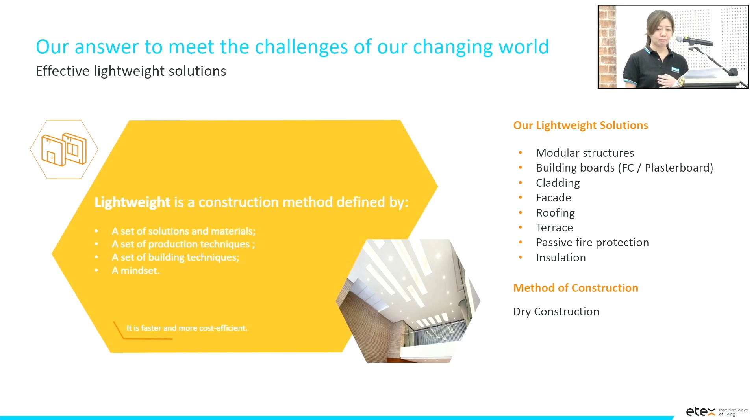All these solutions cover buildings, exteriors, industry, and insulation, and Etex New World, which is under modular construction as well.

We are a global company from Belgium with almost more than 120 years of history, present in most continents. Drilling down to ETEX Malaysia, we've had a presence here for more than 25 years, and we also have a fire test lab.

Here we host the marketing team, the technical team, the commercial team, and the rest of the functional teams as well.

I would like to introduce our team. These are the teammates we have from the technical, marketing, and commercial teams. Our main speaker today is also our regional technical manager for Asia, Promat Asia, John Cha.

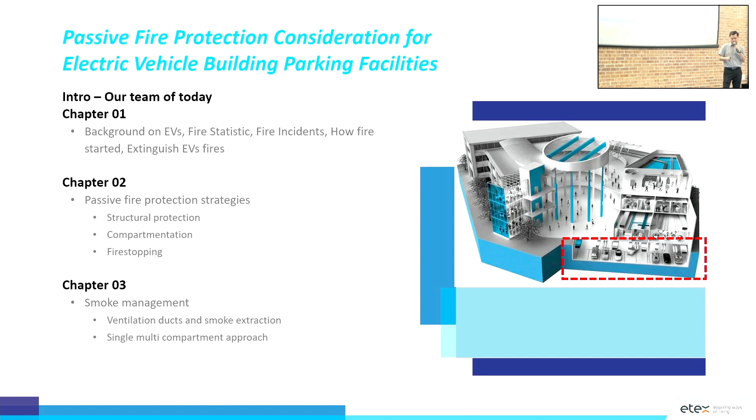So let's quickly go through the background. I was surprised when I dug through the information. Actually, EVs are nothing new, in fact. It actually started in 1832.

Before that, of course, transportation was like riding the horse with a carriage behind, something like that. So during that transition stage, they created an electrical vehicle. It's not the petrol-driven one first, actually. That was centuries ago. So when you look at it, already in 1832 they are talking about electrical-driven transportation.

Then where does this electricity come from, actually? So then I dug further, the batteries were invented by Alessandro Volta in 1800. So they already had this battery thing, but of course not like today what we have. The basic principle behind creating batteries is two metals in contact through some electrolytes, some electrons, ions moving around that create the electricity.

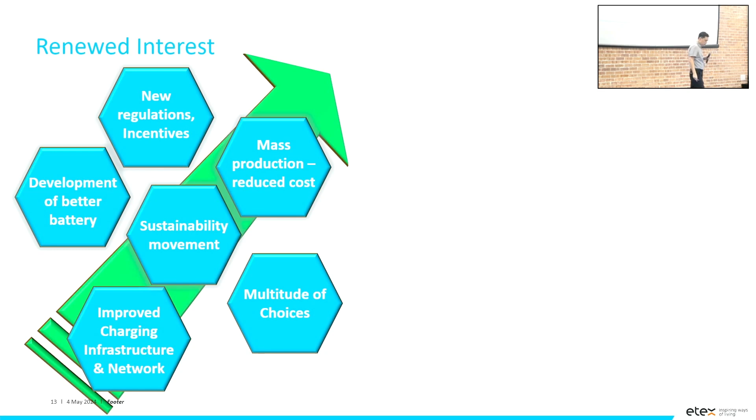But of course the battery technology has changed, with the support of all those microcomputer chips, supercomputers I would say. Those actually assist further on the safety of the battery itself. And then, of course, all this benefits us. As I mentioned, it's low noise, doesn't emit pollutants, low maintenance—not pretty sure yet—and better performance, that's definitely true.

And of course, cost saving. I'm not sure how they derive this cost saving because it depends how you look at it. The other day I was talking to my friend who was driving an EV car. He said, oh, I don't need to pump petrol nowadays, but my home electric bill surged. Right, because you have to charge every time, you have to plug in and charge, right?

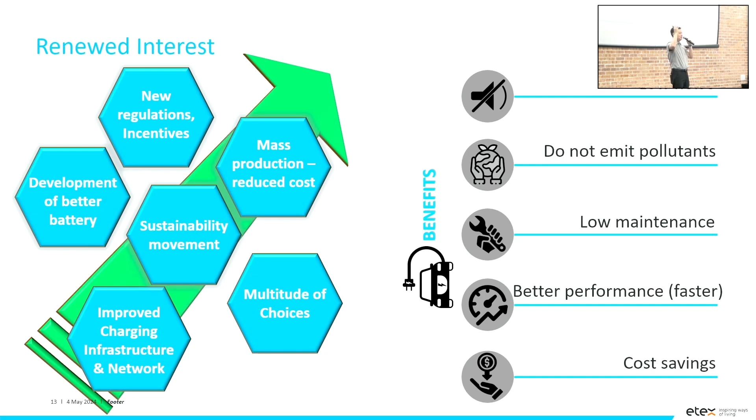But this can be easily solved with another technology, the PV panels, the solar panels installed at a house. That will solve this problem, I think, right?

Okay, so what about the statistics show on fires, EV cars on fires? This is pretty clear. If you Google, regardless of which statistics, it actually shows that the hybrid cars actually have the most cases, followed by the internal combustion engine cars, and lastly the electrical EV cars.

So how true is this actually? But if you really study in depth about the statistics - I believe most of you also do statistics or learn during your university days - it depends what sort of factors, what sort of criteria you use when you do a statistic. As I said, EV cars are pretty new, right? It's only like a decade, 10 years ago, they came out with EV cars.

So the cars are pretty new, actually. So the data, I don't know, maybe needs to be verified further. After some years, maybe 20 years later, the batteries may degrade, then it may cause more fires. So all this we don't know yet. It's not conclusive, all these things.

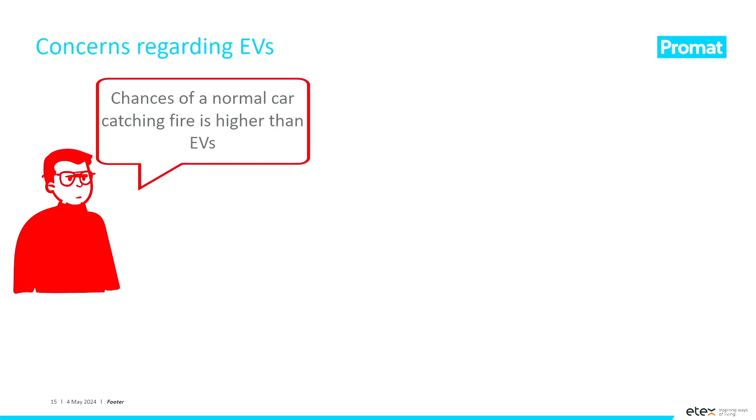So, of course, the concern regarding EV cars - the topic is still like, oh, no problem, chances of normal cars catching fire is higher than EV cars, so why worry? But it's not about that. It's about the severity, the consequences of it.

Okay, so basically, the overall severity in an underground car park is an enclosed space. For us as fire specialists, fire protection specialists, when it comes to enclosed space, it will build up a lot of heat inside there. So when something burns, it's worse, actually.

So when I give you an example, when we do a lot of fire testing - basically, when we look at the fire testing, there's a furnace, we look at the pressure, there's a pressure build up, you take into consideration. So those are some tests that we can actually do.

But in reality, we actually look at the pressure itself. If, let's say, in a room, there's a fire, enclosed - depends how big it is, that's why it determines the compartmentation size, in your UBBL, actually, all the theory behind it. So when it builds up to a certain stage, the fire will turn into flashover pretty quickly.

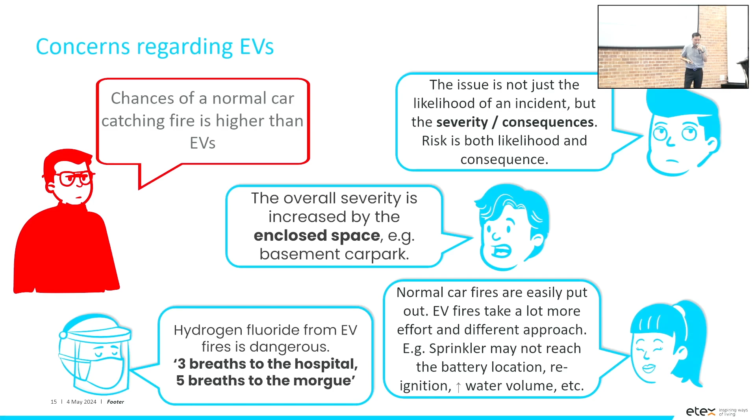Of course, if I use a fist and punch concrete now, I think I'd break my hand first, not crack the concrete. But during high heat, this moisture will find its way out to evaporate, and that will cause the concrete to crack - that's called spalling. This is something we look at seriously, especially in tunnel fire protection. Once the concrete spalls, your reinforcement steel bar will be exposed, and once exposed, it loses its strength.

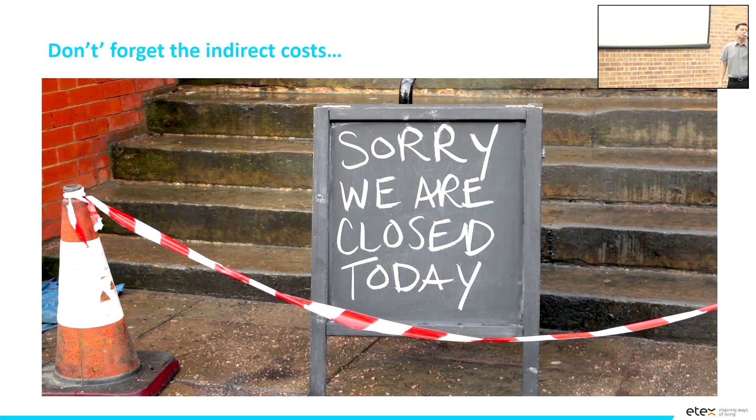So I will cover later on, in the second chapter, how we actually protect the structure. Quickly, of course, a fire in your underground car park will cause a lot of losses to the building owners themselves. We're not going to cover this because I'm not a commercial guy.

So let's look into these EV cars - pretty interesting actually. When you look at it, it's pretty straightforward, no wonder everybody is coming out, car manufacturers want to go into these EV cars. So you have just a motor - the electric traction motor to drive the wheel. On top of that, you have the main batteries, and you also have the other auxiliary batteries, which we also have in ICE cars.

So when we zoom in, there's nothing else - the suspension system and everything more or less is the same. So they don't have to deal with the big, complicated engine. Let's put it in very layman terms: the traction motor is something like a fan, your normal fan, there's a motor behind to drive the fan. But this is a larger capacity, needing a larger voltage to drive it. That's all, nothing much.

So that's why when we come back to the maintenance part, I don't know how you're going to fix it. If your fan broke down, can you actually fix the motor? I don't know, but you need to throw away your fan, right? So maybe you have to throw away the whole motor.

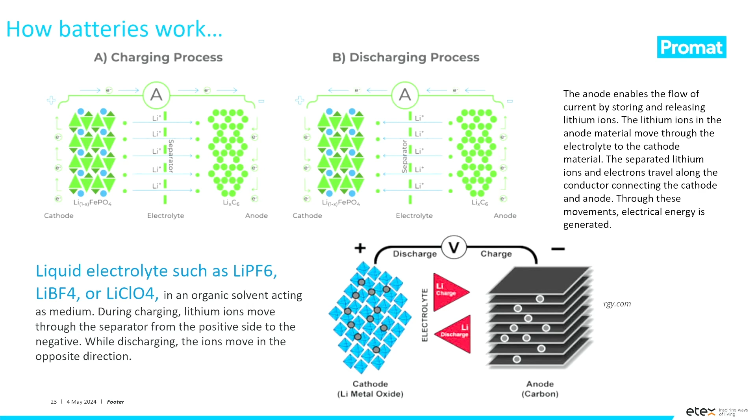So that's why the battery capacity - that's why a lot of car manufacturers keep competing: oh, I can run 400 kilometers, I can run 500 kilometers. All those come back to this battery capacity. So basically, the movement of the ion generated here actually creates the energy and it's being stored. After that, when you start moving your car, they start to discharge all this onto it.

So then now we zoom in further - what actually caused the fire then? The metal plate, the cathode and anode? No, it's metal, non-combustible. The membrane itself? No, that is non-combustible too. But it's the electrolyte - the fluid inside it, actually.

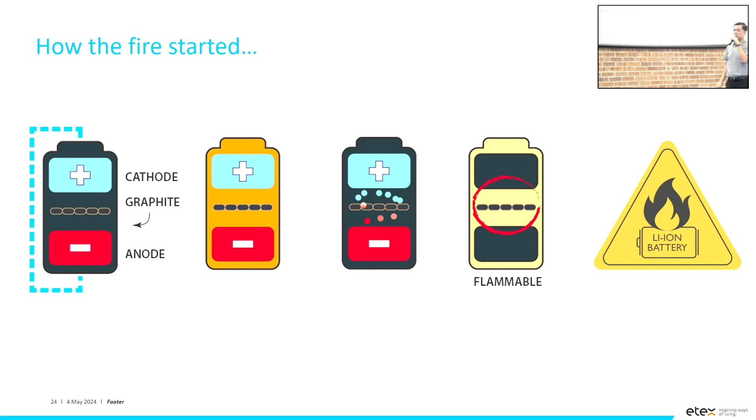So we zoom in further, we can see here - basically it's just a simple graphic about the batteries, how they generate energy, and this electrolyte actually is the combustible fluid. So how does it actually ignite now? It's already inside there, no problem, right?

Okay, so back to the basic principle - the battery cell itself is like a pressure vessel. So if there's a liquid inside and it's heated up, it will vaporize. When it vaporizes, it creates pressure on your battery walls. Until a certain extent, it expands and cracks, and that's where it leaks out. So if there's an incident, let's say you crash your EV car and unfortunately it hits the battery pack underneath, it causes the casing to crack, and it will ignite.

So then, of course, that is not the case if you park your car underneath ground car park charging - you will not cause the cracking issues. So why then? How does it actually suddenly burst into flame?

So overcharging is something that the charger manufacturers need to look into. But of course, looking at the technology today, no problem at all - especially like even our phones, during the early days there was a lot of explosion from overcharging, but now today no problem already. It will just cut off, it won't charge anymore if it's heated up. But in an event something goes wrong with the technology, this will actually happen.

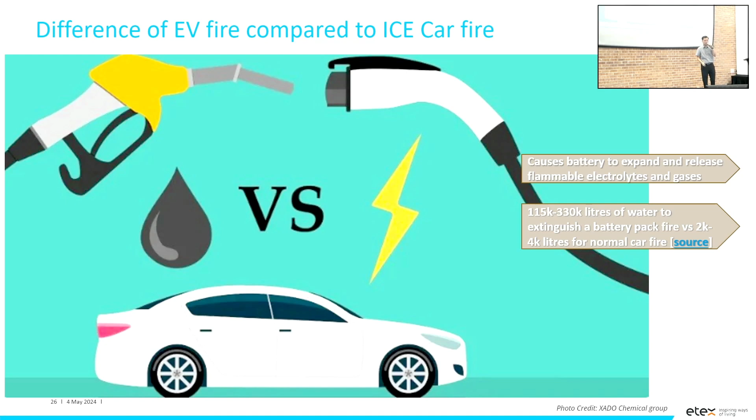So of course it burns for hours and hours. And not to forget, after our Bomba put out the fire, when the tow truck comes and tows the vehicle back to some place, there's a chance it can reignite again. Because of the build-up of heat inside each battery cell, they have a thermal runaway. It's not visible to our eyes. So once they reach a certain temperature, they ignite again, and they keep on continuing.

Okay, so of course the most important thing for us is definitely the fumes that come out from the batteries. This is like hydrogen fluoride and a lot of metals like cobalt, manganese - all those metal fumes, similar to what my colleagues who do welding every day experience - coming out from this vehicle during fire time. So it's really dangerous for health itself.

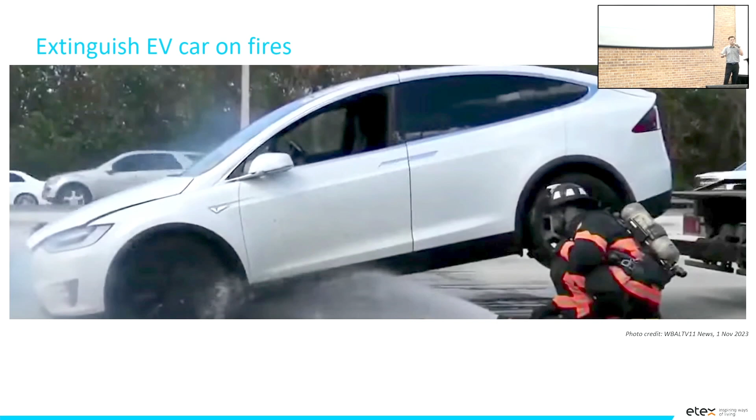Okay, so these are some of the methods I see in case of a fire. They no longer just try to suppress or extinguish the fire blindly, just shooting water or whatever. They have to do it from underneath - either you jack up the car and put out the fire, or some other countries have this special device, a targeted sprinkler, highly pressurized, and push it in to focus on the fire area.

So this is some of the way - they don't have to jack, so they put a brick wall to jack it up. Also notice that in Korea they have all these measures. I think the other picture you see, the blanket one, is in our Bomba guide - you need this blanket to cover it up. The other, weirder way is they actually build a barrier, then pump water and soak the whole thing underneath to cool down the batteries and put off the fire as well.

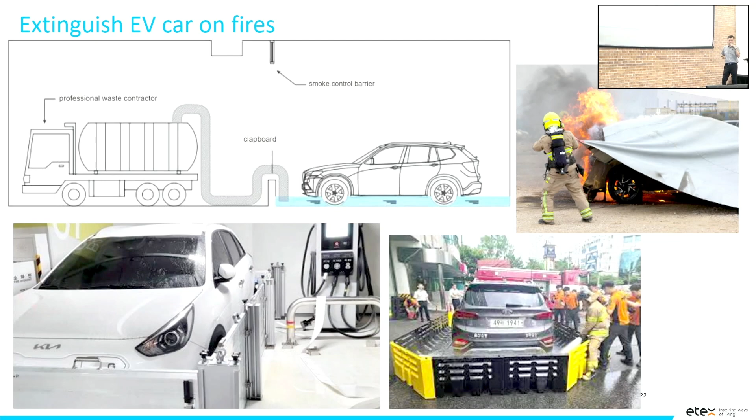So those are some of the proposals, and I think it's still ongoing - they're still trying to find the best way. But think about all this method - it's more practical outdoors, if the EV charging is outdoors. But what about underground? What are you going to do about it? Are you going to have such high-technology stuff like the barrier the Koreans did? Do you have the space? I don't know - those are for you guys to consider.

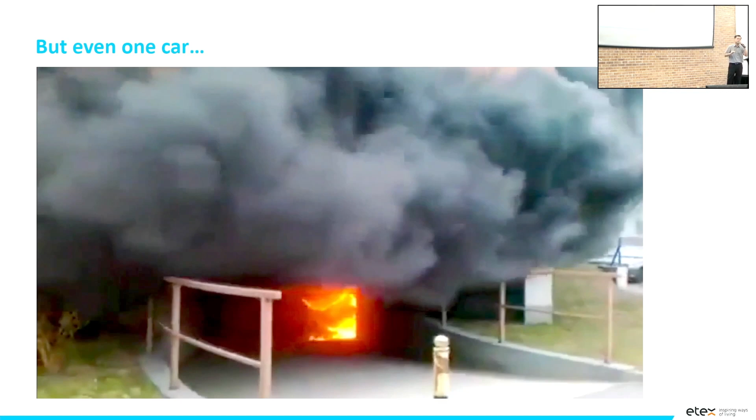All right, so let's remind ourselves a little bit - just one car on fire in a confined space, the amount of black smoke, hot smoke developed is tremendous. So don't play with fire, really. It's really terrible - I myself have already experienced this type of scenario many times. I don't know if by coincidence or not, during my fire testing, sometimes when you pass through and there's a fire, then you get a bit curious and see the smoke is like this.

All right, so let's move on. Now we understand the batteries, or everybody understands the batteries and how they generate the fires. Now how - what are we going to do about it? What sort of measures can we actually put in place? Even though maybe it's not in the guide yet, for us we need to be responsible because we are the building designer, we are the fire protection designer here. So we need to be responsible.

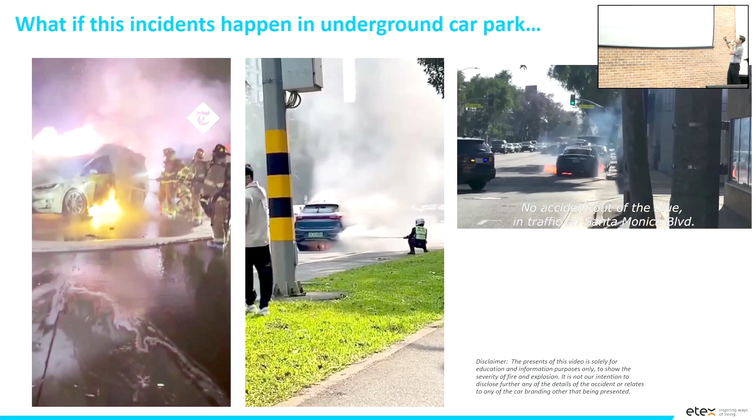So we can't put it out. If you see at the end, the guy also runs away. He cannot put out the fire by just a portable extinguisher, right?

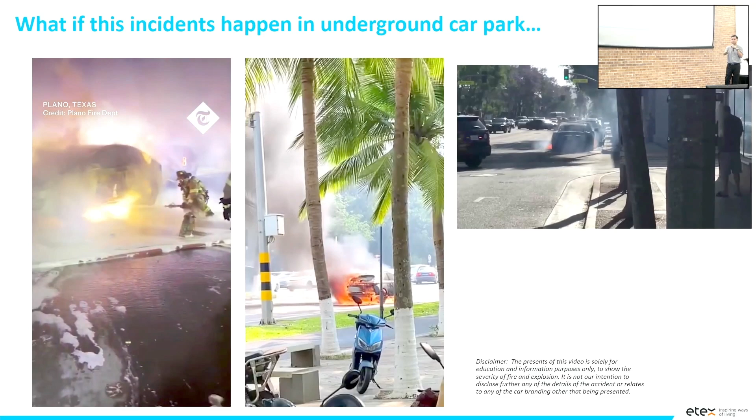Okay, so I believe most of you already know Bomba already came out with a guide. So if you want to design a charging bay, regardless of outdoor or indoor, they will actually teach you how you need to fulfill those criteria. But of course, I'm not going to talk about the overall guide, I will just highlight a few of it here.

So firstly, they definitely acknowledge that the vapor cloud explosion does happen in EV cars. As we understand, the battery vapor is some leakage from the battery in a confined space. The confined space definition here can be your encapsulated battery pack. If it leaks out from your encapsulated battery, maybe you park your car in a garage, then your garage becomes a confined space. So slowly it will build up, build up until it reaches the pressure, and with ignition, you will just explode like this car. It doesn't happen straight away, actually. It will take some time and then it just explodes. So they acknowledge this incident.

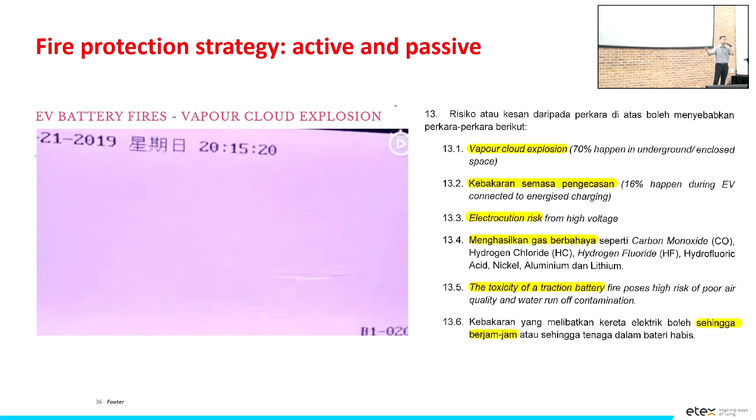So kebakaran semasa pengecasan, 16% happen, right? So it does happen. So there's electrocution risk because of high voltage. Don't forget the batteries generate 400 volts to drive the EV. Our normal is about 200 plus, so that's the thing.

Of course the smoke, when I talk about the fumes, the gases here - carbon monoxide, hydrogen chloride, hydrogen fluoride - all those are deadly, I would say. No chance for you to survive if you inhale this, because our studies during normal fires are talking about carbon monoxide, which can actually just cause you discomfort, maybe when you escape from the building it's difficult to find a path, all that stuff. But hydrogen fluoride, hydrogen chloride, all this is deadly. Even if you manage to get out from the building, ambulance sends you to the hospital, most probably you're dead.

And hours of fire - so those feedback statistics is mostly from outside. If the EV car is outside, the abang bomba can have his own sweet time to put out the fire. But what if it's in underground car parks? Cannot, you don't have a chance at all, right, especially with all the black smoke everywhere.

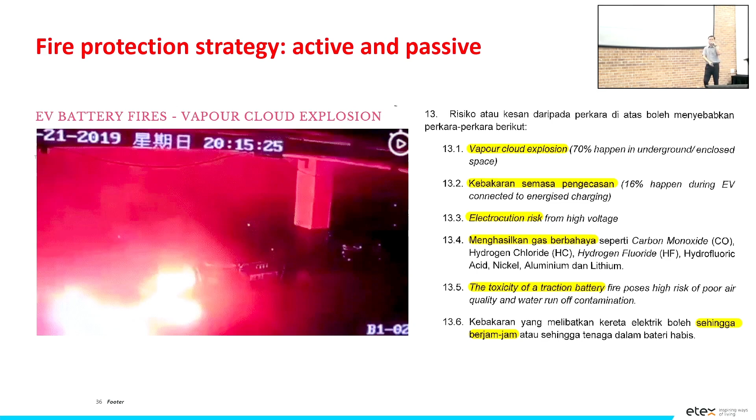Okay, so I extracted it - one of the points is you cannot actually position your charging bay next to your escape passage. I also noticed lately when you drive an EV car, the building owner treats you like a VIP, priority, so they put the charging bay next to the entrance, let's say of a shopping mall or anywhere. So it becomes like, oh, you're so proud of it, I plug in, then everybody can see you driving the EV car. But this is not a good way, right?

So because if there's a fire, then the fire will go inside your pintu kebakaran, everything, and your escape passage will act as a chimney, actually. So all the smoke will go up to the building. So you have to place it far away.

Okay, so then they also talk about how you need to have natural ventilation. So if your multi-story car park is above the ground, it's not a problem, you have natural ventilation. But if you are in an underground basement car park, you need to have mechanical ventilation. But they didn't elaborate further, because this is just a guide.

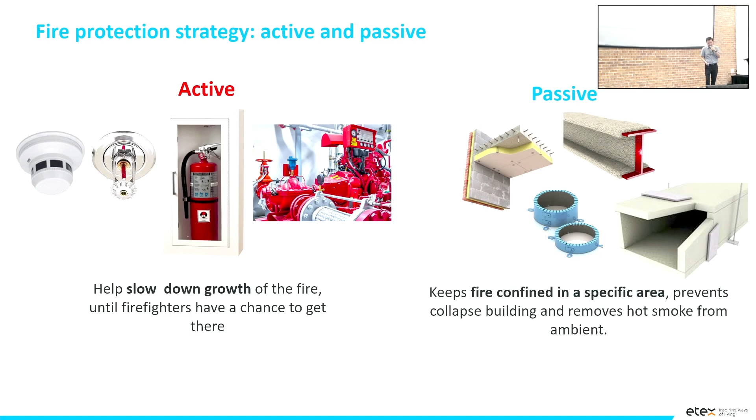Of course the scope, our objective is the same everywhere. Versus active, the most important thing is the building occupants can get out of the building during fire time, and at the same time let our firefighters go in and put out the fire safely. And the third is only the building. So human life is the most important here.

But when I presented this to some countries, everybody laughed at me. Human life? They said building is number one, the cost is number one. I won't say which country, but I think some of you know. They say, I have a lot of people, no problem. But regardless of which country, our objective is to save life.

So as I said, structural protection - I'm running out of time, but let me quickly go through it. Structurally, basically if you don't protect steel, it loses its strength at 550 degrees C. A lot of people throughout my years come to me saying steel is very strong, no problem. Yes, during normal ambient conditions, but when exposed to 550 degrees it loses its mechanical strength and starts to buckle. When it buckles, what happens to your building? It collapses. So this is the first area of protection we look at in a building.

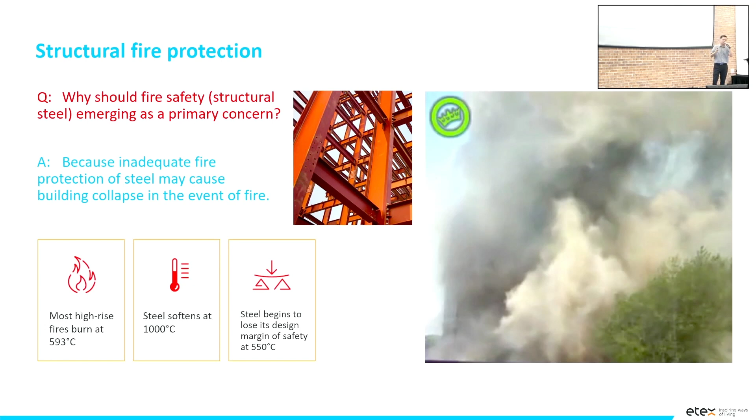Structures, especially buildings made of steel structures, still need to be protected. Not just simply put some concrete and hide it - no, you need to protect the steel appropriately. So those are some visuals. I'll run through quickly - these are some hot smoke rising up, so the first thing they attack is your ceiling.

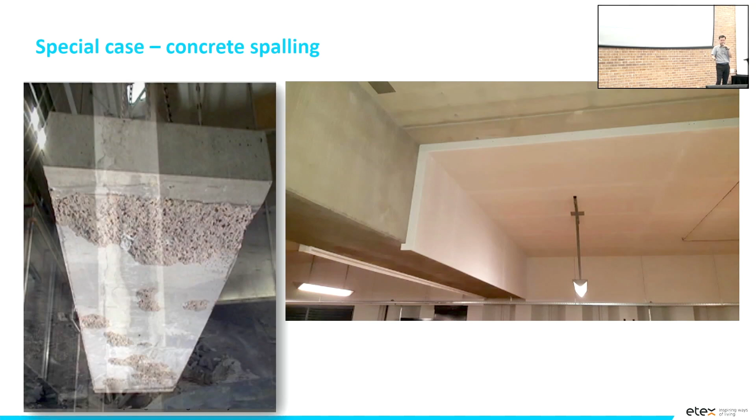So these are some of the solutions we offer in passive fire protection. You can encase it with boards, you can do some vermiculite spray, and if you want to show off your steel structure, we have intumescent paint as well. All these are available on our website, you can go look for it.

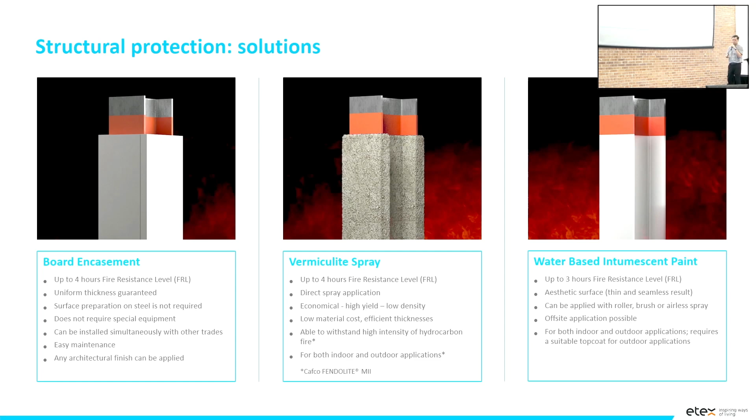Second strategy we are looking at is compartmentation. Everyone here definitely knows this is a very basic principle of fire protection. It's actually to limit the spread of fire from one compartment to another, restrict the movement of smoke, and optimize evacuation routes during fire time, with certain sizes permitted which we refer to in the UBBL.

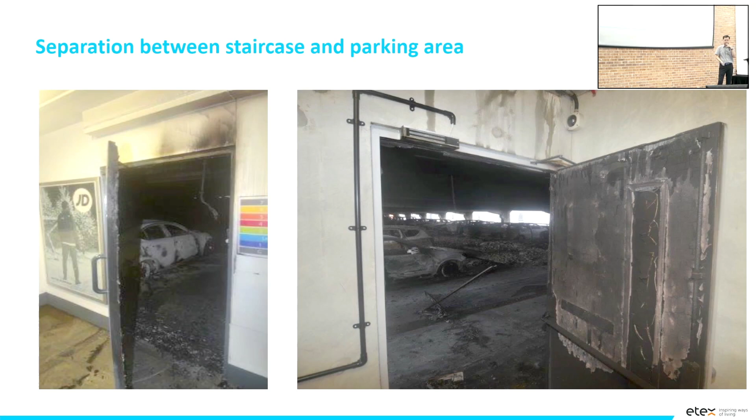Classified as compartmentation solutions, we can look into walls. But of course it's not just wet construction. Current research and testing have shown that dry construction can actually resist fire up to 4 hours. But I still see a lot of wet construction around, thick heavy brick walls. So please check when you submit to BOMBA, check your local BOMBA whether they can accept it. Some can accept, some cannot, so please go and check with the local BOMBA.

Fire rated ceilings are also part of the compartmentation. You have a suspended ceiling, and a ceiling without suspension. Those have a limited span area that you can do it.

Very importantly, when I mentioned roller shutters, take extra care. Especially in car parks, I noticed a lot of cases where there's non-fire rated glazing, then they put a fire rated roller shutter thinking it solves the problem. But there's a gap above the roller shutter - how do you treat it? Detailing is very important. You need to seal off that particular gap.

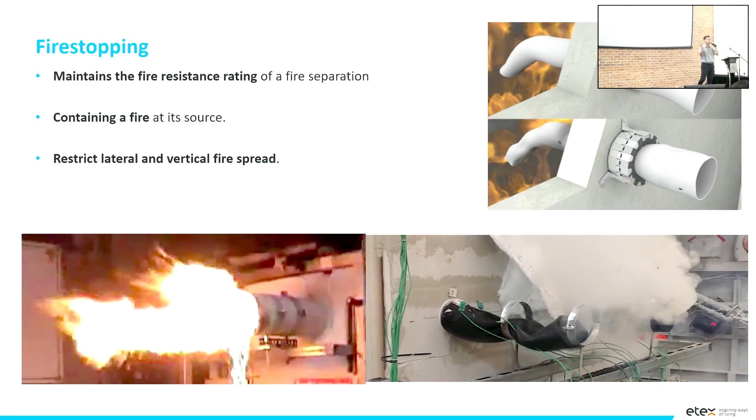So there's no point spending so much money - sometimes I tell my client this - but all these small things are not done properly. So what's the point, just to fulfill the documentation? When I walk around everywhere, I see it's not being done correctly.

Of course there are a lot of solutions with appropriate materials. There's a study that shows if you have a room of 6 meters by 6 meters, there's a fire in that room and just a small little hole - how long do you think the next room will fill with black smoke?

An hour? Anyone want to give it a try? 5 minutes, 10 minutes, half an hour? Okay, I'll open the question.

So it's 3 minutes and 20 seconds - that's how fast the smoke moves. Actually I wanted to show another slide, it's very funny, like a person running away with the smoke chasing him, something like that, to show how fast the smoke spreads. But those are cartoons so I won't show that. This is a real study they found out.

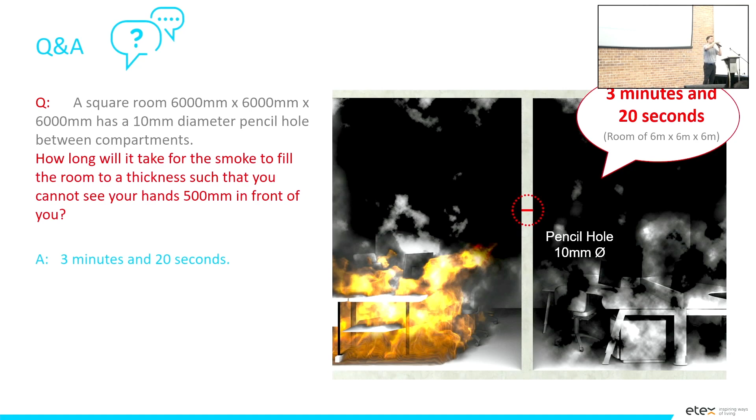It's very important to seal off whatever openings, especially now with EV cars and charging bays - the cables will penetrate somehow through your compartment, so those need to be looked after. Unfortunately I also saw in some established buildings it's not properly fire stopped - there's a gap, and if there's a fire, it will just go up. These are some of the situations here. Of course, where the cable goes through, you need proper products or systems to close this penetration. There's no point just talking about how well the charger works.

But when they penetrate through, those are the weak points, okay? So these are some of the samples. You can easily find it on our website, all right? How you actually solve the situation here.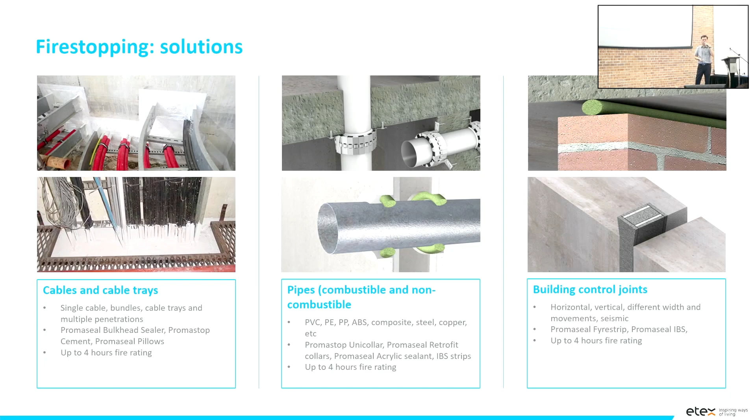So the last chapter I want to go through is smoke management. As I said, smoke actually kills, not the fire, so we need to look at it. I think the topic of discussion in Malaysia is always, is it an insulated duct or non-insulated fire-rated duct here, right? So the concept behind is actually very straightforward.

If you have a single compartmentation, just one small little compartment, there's some duct going through. The duct is to extract, if there's a fire in that room, you want to extract the smoke out of the building straight away. One compartment, you can get away with non-insulated duct. But if your fire-rated duct passes through, like shopping malls, numerous compartments, the first one when it started the duct, you can get away. But the rest of it, passing through different compartments, it needs to be insulated. You cannot have non-insulated duct on that.

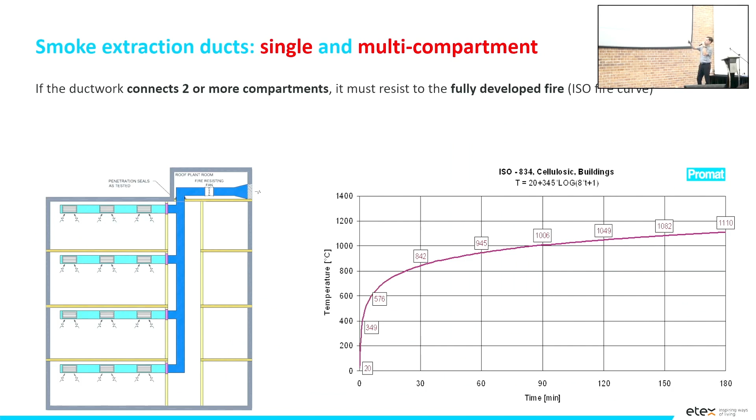So there's a lot of graphics here going to pass through. So of course there's a new challenge for the smoke extraction in car parks, underground car parks, because of the toxic fumes that they're creating here. So some of the compartmentations here, one of the graphical representations, you can see here, it passes through many compartments. So it needs to be actually insulated.

So the reason behind, as I say, back to our objective, is to protect people during fire time. So if your duct is extracting hot smoke out of the building, passing through various compartments, coincidentally you are running for your life. If it is a non-insulated duct, it is very hot, even though you won't see the fire. You create an atmosphere easily more than 100 plus degrees C or 200 degrees C in the environment, in the compartment itself. Do you think you can run during this type of temperature? You can't, right? So it's very dangerous.

So I would like to invite all of you, if you have a chance, come to our local fire lab, you can experience it yourself. Normally if we do some uninsulated fire-rated system test, we as test engineers will walk very far away. During the test, we don't get close to it because it's very hot. The temperature inside is 1,000 degrees. The temperature transmitted out of the fire site is about more than 800 degrees C because it's uninsulated. So of course the heat will dissipate after that.

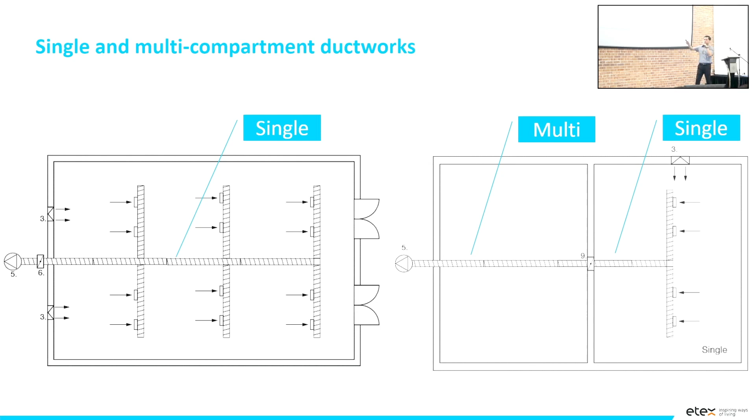Okay, so I quickly go through. I think these are just to show you a multiple or single compartmentation, you can see here. So passing through the escape passage, you need to be having an insulated duct. I think we have a sample of how you actually install an insulated duct system. But of course, in Malaysia, I think a lot of uninsulated ducts are going around.

So as a system owner, when we apply for Bomba cert, Bomba actually straight away says, if you have an uninsulated duct system, I'm not going to give you Bomba approval. So I said, then how? My clients still ask me, they want an uninsulated duct system to put in place.

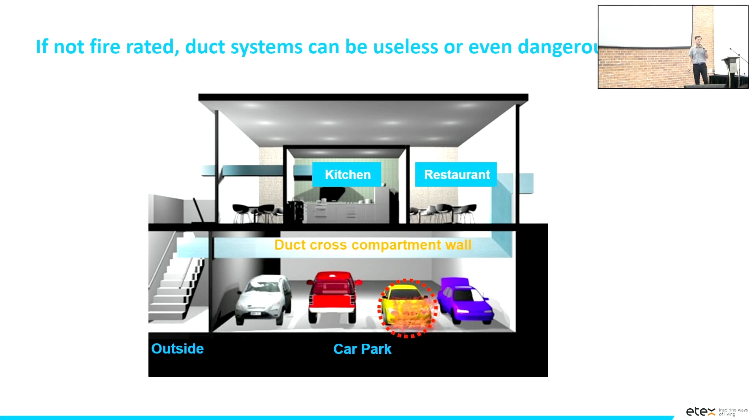Okay, we almost come to the end already here. So there's another way to show if you have a non-fire-rated duct in your car parks, what will actually happen. So when the car starts on fire, it starts burning, then your so-called non-fire-rated duct will collapse, and it doesn't do the work to extract the hot smoke out of the building. So basically it will just spread everywhere. So it's our responsibility to actually put in the correct system in place, to ensure that the fire or smoke doesn't spread around.

So those are some of the solutions you can see in the market. What is a fire-rated duct? It can be made of boards, cladding. Normally with the boards, there is a layer of rock wool or mineral wool insulation, stone wool insulation, in it.

If you don't see stone wool, normally it does not give you any insulation. We have another type in the market without the steel liner, where the board itself forms the duct. It also gives you full insulation, but the board is thicker. So in the market you can see a lot of coated duct systems in place.

So next time, go to a shopping mall and look up there with some paint - most probably it's without insulation. If you need insulation, understand the paint is not magic; it can resist fire, but it cannot provide insulation. You need to put a layer of stone wool on it. Just go and look around - you can see whether we're doing the right thing or not.

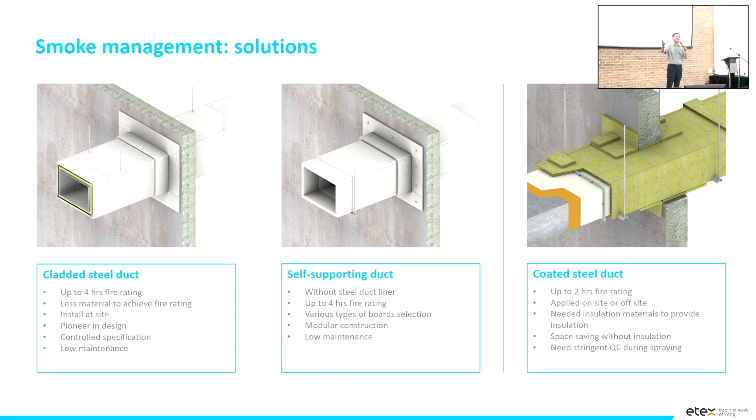Before I come to a conclusion, I need everybody's help here to improve us further, because I'm in the fire protection world and you guys are the designers of the building. Somehow, some way, we will collaborate - we can sit down for discussion. Our marketing team did 10 questions, very easy to answer, I think it's your daily thing. Please give some feedback - these are very valuable for us.

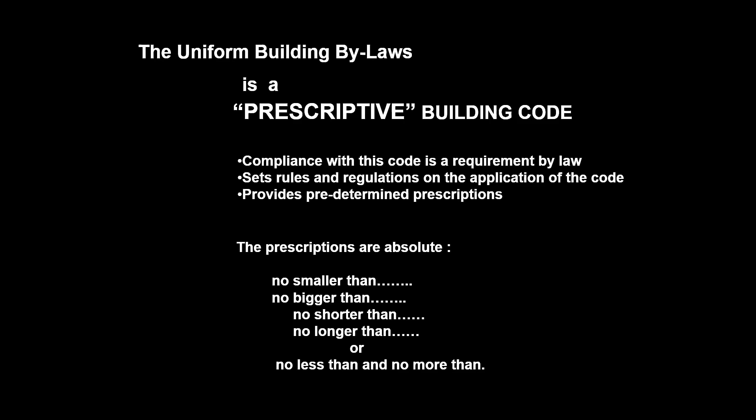Everyone needs to understand that the UBBL is a prescriptive building code. It provides predetermined prescriptions that are quite absolute - no smaller than, no bigger than, no shorter than, no longer than, no less than, no more than. That's the kind of prescription we have in our building code. While the Malaysian Standards is a descriptive code of practice. Please understand this, sometimes you get confused whether it's part of the bylaw, part of the law, or just a guideline. MS is actually a guideline, a good practice we have to follow.

I think most of you should know the 4 concepts of fire protection: passive containment, evacuation, active intervention, and firefighting and rescue. These 4 concepts of fire protection are something we have to hold on to. Today we will only talk about passive containment, otherwise 2 days will not be enough.

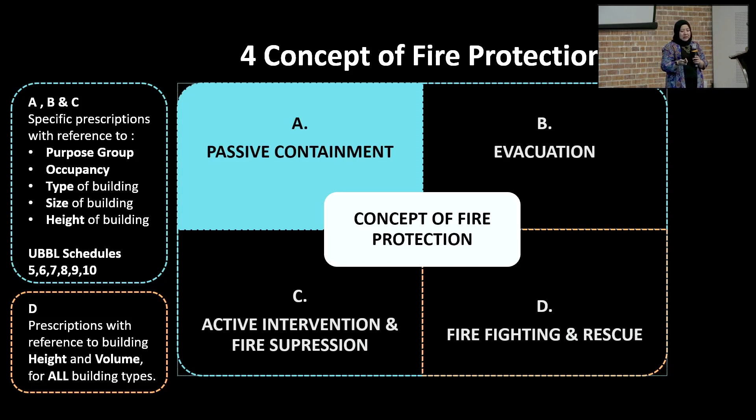As shown here, I'll start with D first. Firefighting and rescue is for all building types, with prescriptions referencing building height and volume. However, for A, B, and C, it will reference purpose group, occupancy, type of building, size of building, height of building - a lot of things to consider. You have to conform to UBBL Schedule 5, 6, 7, 8, 9, and 10, and 11 in fact - there is a new Schedule 11, if you want to know.

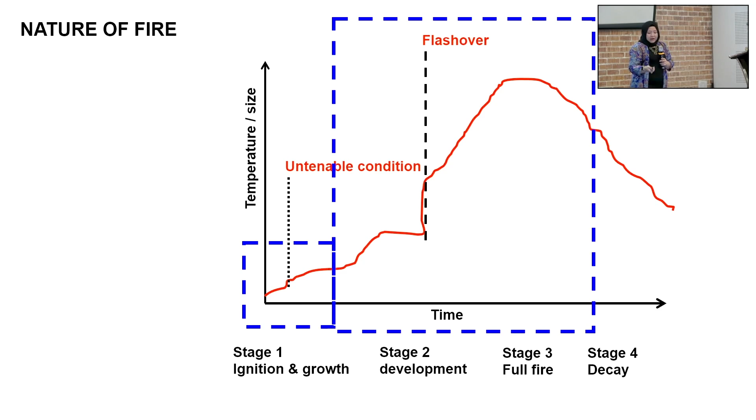Nature of fire - I think we've seen this before - is the life cycle of fire, starting from stage 1, ignition and growth, to development of fire, full fire, and decay. At one point we have flashover, where there's a steep curve. There is also an untenable condition in which we need to get people out of the building during this time, in relation to the entire life cycle of a fire. This is a very small period of time to ensure everyone is safely evacuated.

So we need to know this assumption for safe evacuation: only one fire at one location at one time. And for compartmentation, to contain the one fire within the one location at all times. So if there are 2 fires happening at the same time, it is considered arson. This is the assumption we have all agreed upon in order to do fire safety protection design.

Contributing factors to potential fire loads - I think we all know these: fittings and furnishings, including the building itself, furniture, equipment, consumables, storage items, and so on. In our MS 1183:2015, occupancy characteristics show 2 main characteristics: the top portion is familiarity of the space itself, and the other is the level of consciousness of the occupants, whether they are awake or asleep.

Different types of buildings have different fire risks. For example, office space is quite safe, where occupants are familiar with the space and awake most of the time. Hospital inpatient wards are a high-risk area because most occupants are asleep, possibly immobile, and unfamiliar with the space.

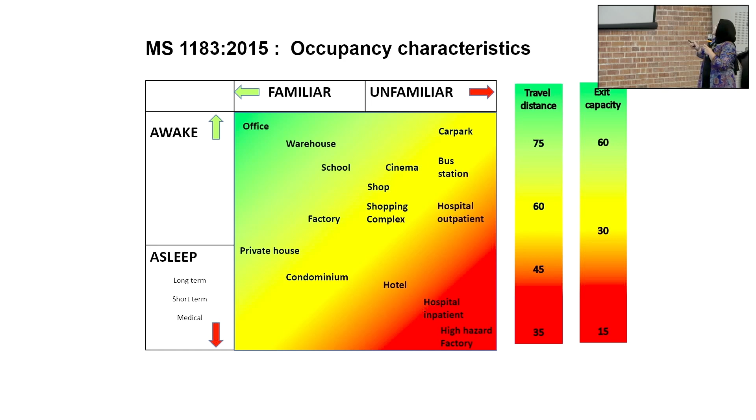This relates back to the travel distances prescribed in our bylaw. Offices have longer travel distances, while hospitals and high-hazard factories have the shortest distances. Exit capacity will also be larger for offices and smaller for high-hazard areas. Those are the basic concepts I need to touch on first before we go through the details.

Fifth schedule, purpose group, and limit of compartmentation.

For younger architects, if you just graduated, you're lucky, you never knew the 2002, 2012, or 1984 versions, so you just refer to the current UBBL. That's fine. The harder part is when you started working a few years ago and now need to shift your understanding, so you will need to study a bit more. There are new clauses.

And for the fifth schedule, purpose group, dimensions of buildings and compartments. So in today's topic, basically only these five clauses are related to the changes.

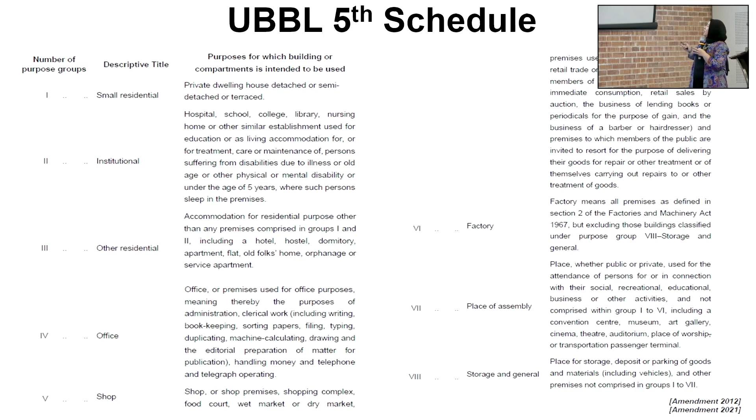So what happens if you are doing a data center? Who knows what is your purpose group? Hasn't anyone done a data center? So for a data center, most probably you have to go through FSDP, Fire Safety Design Philosophy, in order to confirm what would be the usage of the building. This is what I understand, because no data center is described in this UBBL fifth schedule.

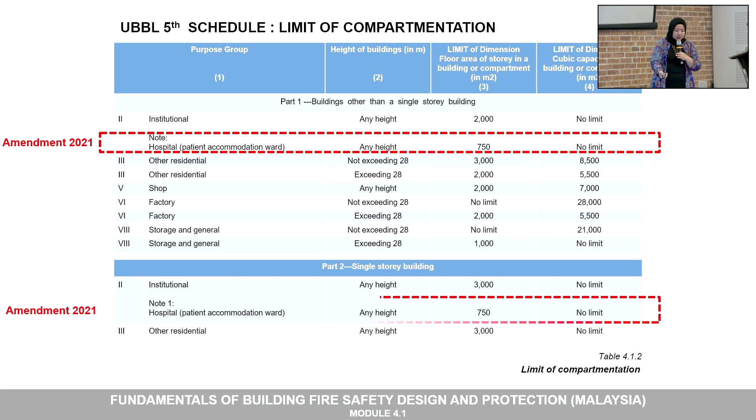So the fifth schedule also touches on dimension of buildings, compartments, single-story buildings, and others. For others, dimension limitation does not apply to small residential offices and place of assembly. These are the recent changes for Amendment 2021 - just a small addition to hospital where the limit of dimensions is being revised. Just a small amendment.

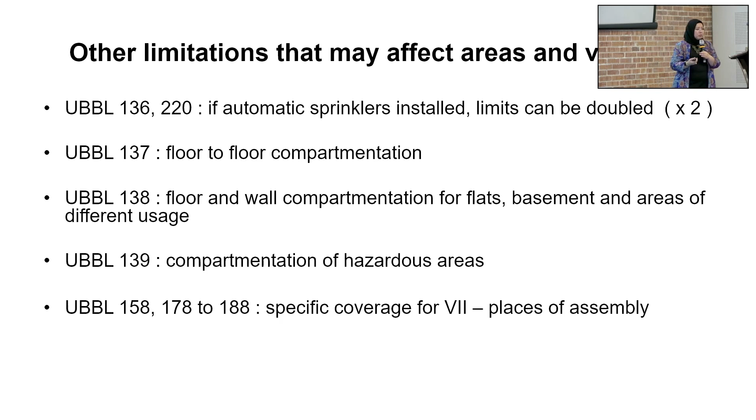Other limitations that may affect areas: if you have a sprinkler system, the limits are doubled. Floor-to-floor compartmentation, floor and wall compartmentation for flats, basement, areas of different usage, compartmentation of hazardous areas, and places of assembly - we have special provisions in the bylaw. I will show all this in a diagrammatic manner later so it won't burden you so much. Travel distances and occupant loads may affect the volume as well.

So we go slightly deeper in terms of compartmentation concept, prevailing building codes, and recent amendments. Compartmentation-related bylaws will be 135 to 139, and also amendments 2021 - this is the major one.

Bylaw 137 - this is the comparison between 1984 and 2021. There are certain changes in which two clauses, sub-clauses, have been added on, which I will show in a diagrammatic manner.

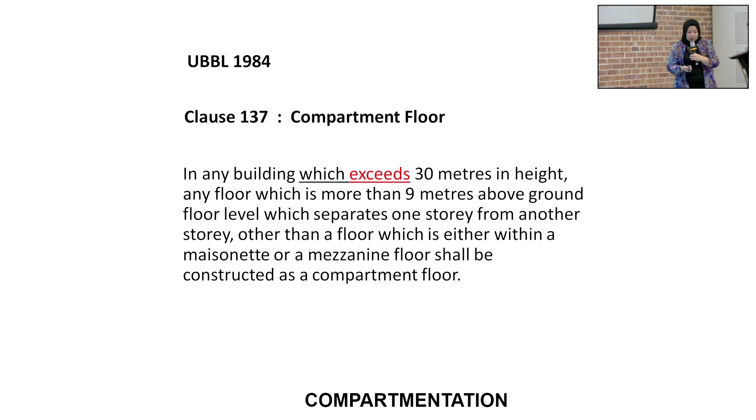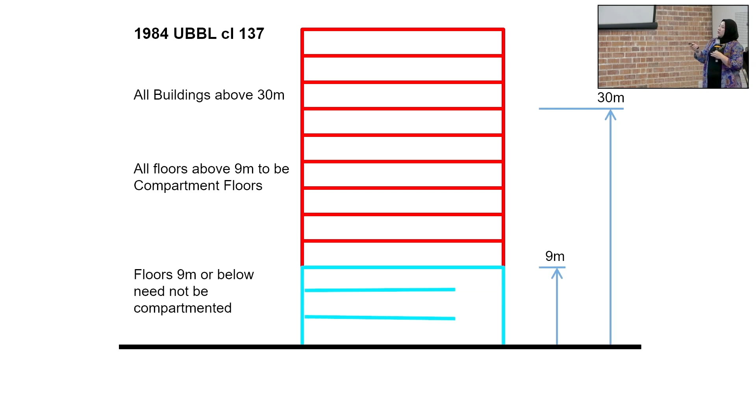You see the building is less than 30 meters - so 9 meters here is the limit. All buildings above 30 meters, each floor would be a compartment floor. This is what the 1984 bylaw prescribed. 9 meters or below need not be compartmented. So this is bylaw 137.

So in a way they're saying buildings below 30 meters need not have any compartment floor, which is slightly debatable. Hence the revision in 2021. I won't read it fully, I'll show this in a simplified manner. The 2021 revision, clause 137, says any building not exceeding 30 meters, floors above 9 meters are to be compartment floors. Floors 9 meters and below need not be compartmented.

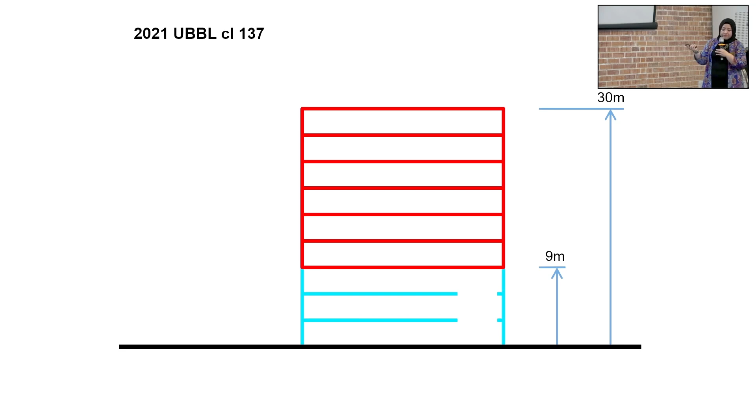So above 9 meters, every floor will be a compartment floor. And for any building exceeding 30 meters, all floors are to be compartment floors, including floors below 9 meters. So this needs to be refreshed for all of you.

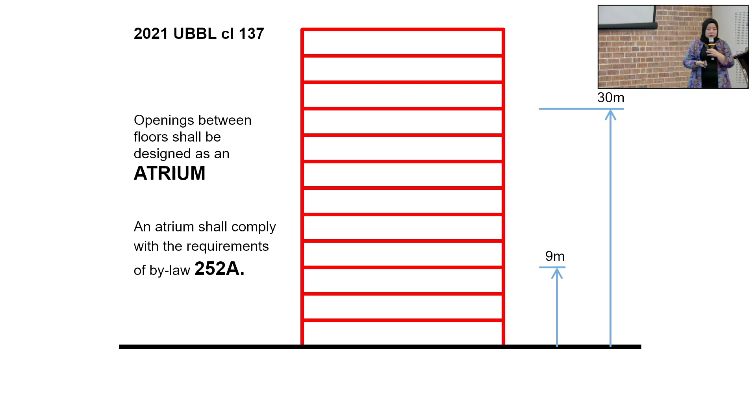Openings between floors will be designed as an atrium, which is prescribed in the new bylaw 252A. So this is atrium design, similar to something we have in bylaw 137 before.

If the floor below the fire engine accessway, the basement floor, is less than 100 square meters, no compartment floor is required. If it's in red, that's basically the line of compartmentation, so this doesn't require any compartment. But where the area is greater than 100 square meters, meaning the entire floor will be constructed as

a compartment floor, and we need to provide this. This is considered like atrium design. We need to compartment the basement floor as well, including the ramp that goes up from one floor to the other.

The other one is bylaw 139, fire risk area. We know electrical rooms, LPG rooms, all these need to be compartmented because they are high fire risk areas.

There is an addition to 139.2: for hospitals and nurseries, purpose group 2 institutional, labs, and kitchens shall not have sleeping accommodation above them, and shall form a separate compartment from inpatient treatment areas and public areas. This is just to make sure we reduce the risk for places where people are sleeping.

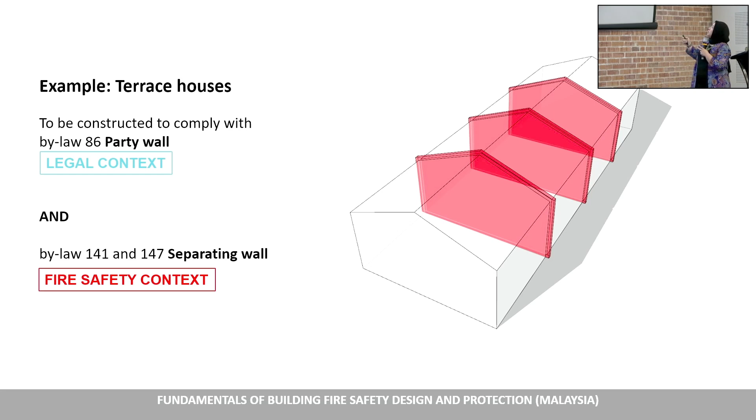We'll show this in a diagram later. So for a sample terrace house, legally we call it a party wall, and it is also a separating wall under fire safety context. For multi-story apartments with individual ownership, in legal context these are all party walls, but also compartment walls under fire safety context.

So the two requirements - compartment wall and separating wall - have different requirements in the context of fire safety. Hope everyone understands that concept.

The next one is the 9th Schedule, fire resistance for elements of structure. Basically it's just telling us that elements of structure will require a minimum period of fire resistance, in reference to UBBL 213, specified in the 9th Schedule.

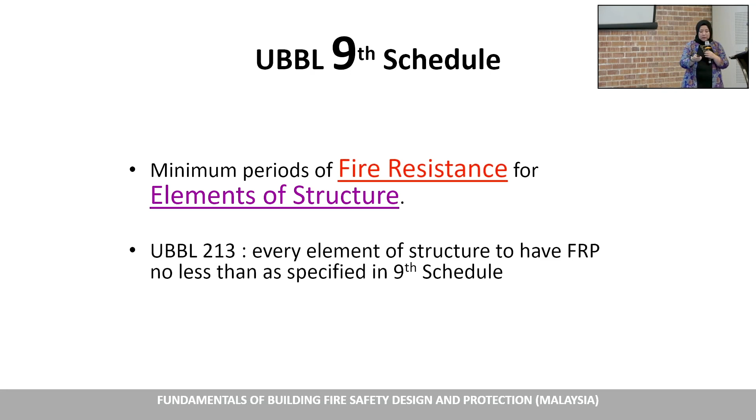This is quite generic. The objective is to minimize the risk for occupants during the evacuation process, containment for the spread of fire, to reduce the risk of firefighters, and also to reduce the danger to people next to the building.

Element of structure - I think everyone knows the definition. You just need to highlight that the roof structure is not part of the compartment, not part of the element of structure. Some people ask, even if you're building a factory, does the roof need to be fire rated? Actually no. Floors, external walls, separating walls, compartment walls - all this is included as element of structure.

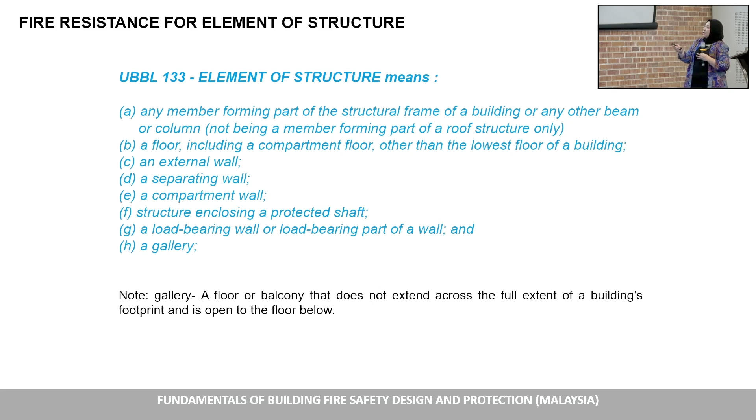So gallery here, in short, means balcony. Another understanding we need to know is the difference between fire resistance and reaction to fire.

If you've heard about class O, class 1, class 2 - that is actually in reference to reaction to fire. So here, you have a room with all these furnitures, the reaction of fire, whether it is a class O type or class 3.

So that's one, and the other is fire resistance, which covers structural stability and prevention of fire spread from one compartment to the other. So fire resistance is actually this element over here, that it prevents the spread of fire.

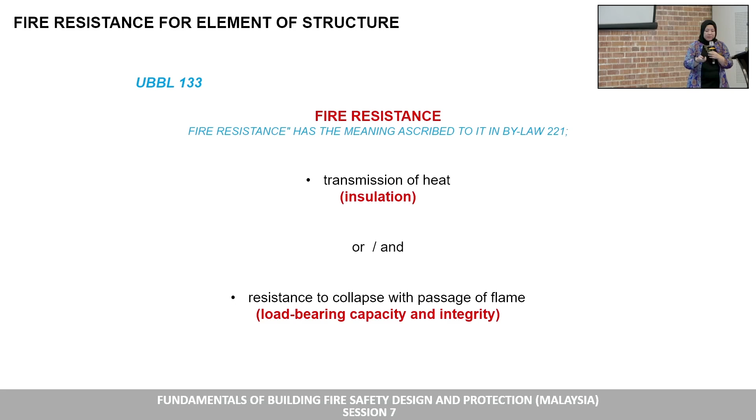So in UBBL 133 under definitions, fire resistance means that it has some factor in terms of insulation and also load bearing capacity and integrity. Just for information, the fire rating is measured in REI. R is the stability, the load bearing capacity of the material itself. E is integrity, the ability to resist flames and gas vapor from the other side, and also insulation, the ability to withhold the temperature. This is some of the reason why we have that insulated fire roll shutter, which is so expensive. The client is annoyed at us, like, oh, I need fire rated roll shutter here, and then they say, too expensive, can we not have it? So actually, this is with regards to the requirement of fire resistance. We need to look into that.

Okay, so I will use this diagram, and it will progress up to the determination of fire rating of each component. So we start off with this one building. One part of it is higher, lower. We have 3 levels of basement as a start. So the height of building is actually measured from the fire appliances access height, from ground floor, or we call it FEA level. This is the height of the building that is considered here.

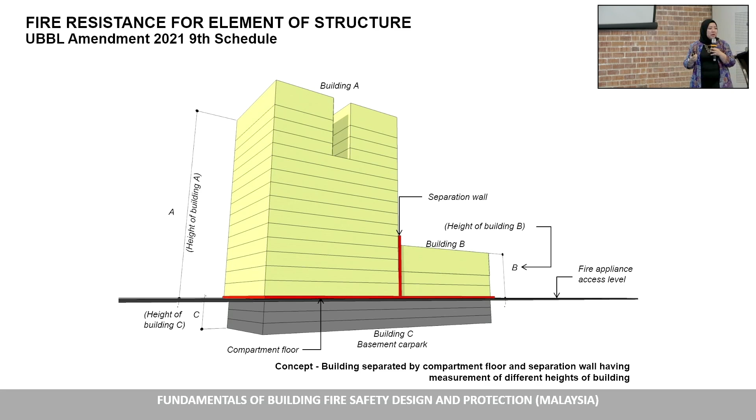So we considered this as building A, the height of building A, building B, height of building B. Make sure you have this separation wall. So the requirements of building B and building A will be different based on 9th schedule. Building C, so even the basement car park is considered as a building, so it's building C. This is the height of building C. This is how we refer back to our 9th schedule later in terms of the limit of compartmentation.

So we add on more spaces. This is a mixed-use development. We have service apartment on top, we have offices below, retail at the bottom, the first 3 floors. And for the next building B, we have Cineplex, we have retail, 2 floors of retail. So this remains as basement car park.

So when we add different purpose group, in bylaw 138C, it says that once you have different purpose group, you need to compartment in between the two different compartments. So basically, service apartment and office need to have 1 compartment floor, retail and office 1 compartment floor. This one stays. Cineplex and retail 1 compartment floor. So that is, we are going through one by one. Actually, the result later will be different. It's just that we are going through the thought process of how we identify this building structural elements.

And then there are 2 conditions. This is scenario 1, in which the building is not exceeding 30 meters, so less than 30 meters. Any floors above 9 meters will be constructed as compartment floor. This is the change that I mentioned earlier. So 9 meters below, all the retails need not be compartment floors. Height of building B, because of the different compartmentation, different purpose group, between the Cineplex and the retail, we will have a compartment floor here.

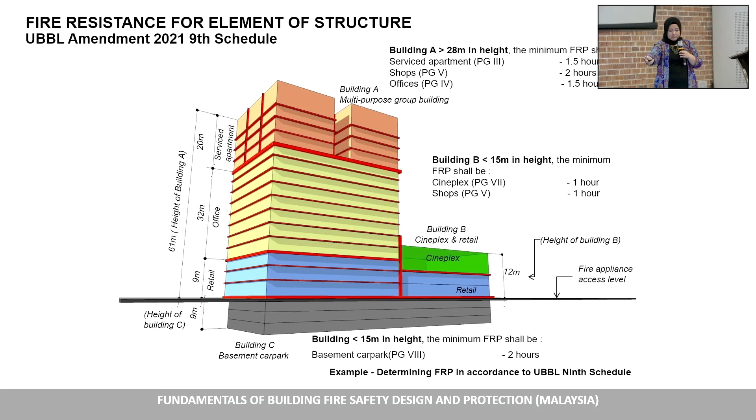So when we design that, we just mentioned the apartment is 1.5 hours, offices 1.5 hours, shops 2 hours. But we need to remember to consider the most stringent one. So at the end, actually it is not that—we have to consider the most stringent one, which is building A at 2 hours FRP. Building B is 1 hour, both are the same anyway. Building C is only one purpose group, so it's 2 hours. This means the determination of FRP needs to follow the most stringent one, because it's a mixed development.

This has been covered by John earlier, so I will just mention it again. Materials and systems—the structural elements will be protected by certain materials, for example concrete covers for reinforced concrete. This is required and shown in the 9 schedule. Intumescent protection is a reactive coating which expands in heat exposure. It's usually used for steel structure, but it can be used for concrete, timbers, and other composites as well.

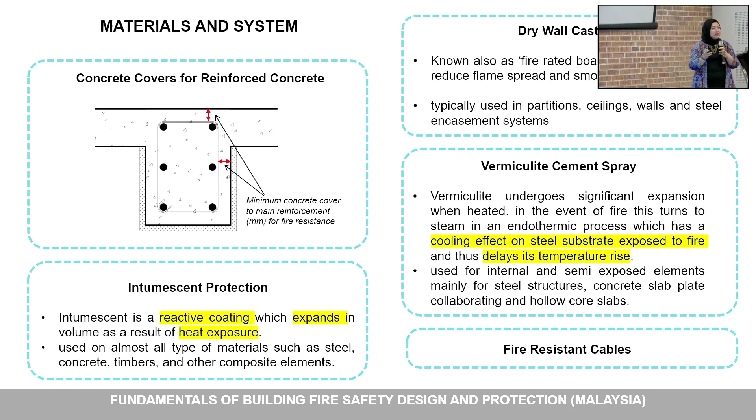Then we have drywall casing—these are fire-rated boards, we're all familiar with that. Vermiculite cement spray is also a spray; however, it gives a cooling effect to the steel substrate, delaying its temperature rise. If you recall, John showed us earlier that steel got warped, right? So basically we want to delay that process so the structure of the building does not fail so easily. And also fire-resistant cables.

For fire test and certification, we need to ensure it's approved by SIRIM QAS, CIDB CAS, and also our own Bomba.

So we are approaching the end already. We talked about the larger picture related to the purpose group, which is most important for any part of fire safety protection. Then we went slightly deeper into the compartmentation concept, then the 9 schedule and the elements of structure itself, how to determine this, and then we look into the protection of openings in compartments.

Why do we need this? It's for functional purposes—to facilitate the movement of people between two compartments, and also the installation of services, like pipes, ventilation ducts, ACMV, things like that. Protection of openings is required to prevent the spread of fire and smoke. As we know, it's very dangerous—smoke will kill you faster than fire—so we need to provide time for safe evacuation and active intervention.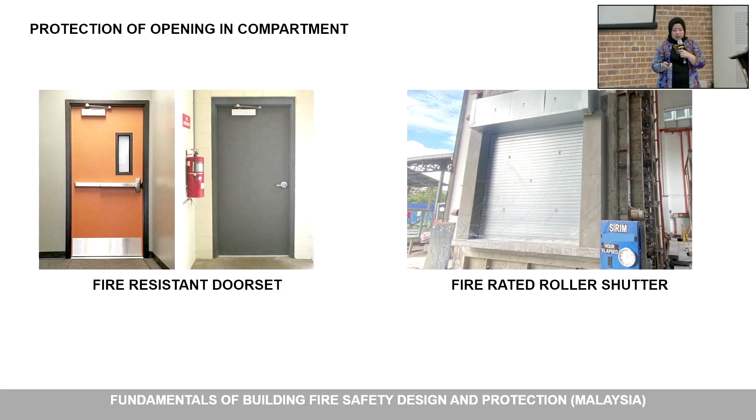So this is one sample—fire shutters or doors will be used as protective openings for compartments. We have these two: fire-rated roll shutters and fire-rated doors, nothing much to cover there. Fire-rated roll shutters come in 3 types—the more familiar one is the vertical fire shutter, then there's folding sliding FRS, and also lateral and horizontal FRS.

To be honest, I haven't seen this one, I would like to see one. So whoever is doing malls, please let me know if you're doing one—I want to see it. So these are the 3 types of fire shutters.

But there are also 2 categories of fire roller shutter: insulated fire roll shutter and uninsulated fire roll shutter. These are the requirements for the insulated and uninsulated ones—integrity for insulated ones needs to be 2 hours, and 2 to 4 hours for uninsulated FRS. The standard will be based on MS and BS standards.

Applications are used to protect openings in compartment walls or floors. The 3 types we've seen earlier are vertical, folding sliding, and lateral horizontal. Fire shutters with integrity and insulation—this is insulated fire roll shutter—may be used as compartment wall, except, and this is very important, for FCC you cannot use fire roll shutters in protected lobbies and protected exit routes, including stairs and corridors.

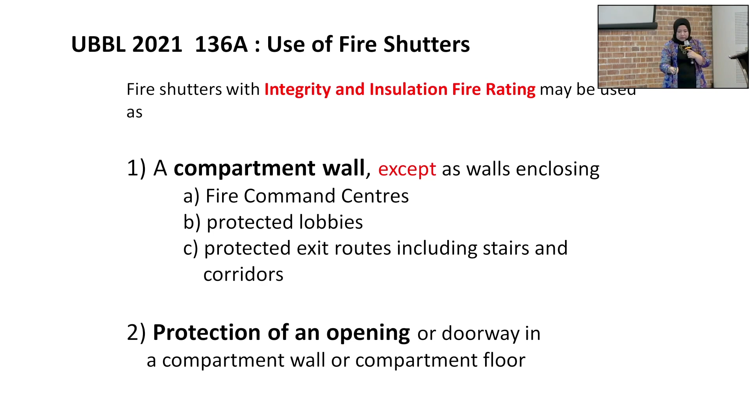Insulated fire-rated roll shutter—so we have this as an opening to open up compartment A to compartment B, this is compartment wall. The other one would be to open up floor openings in a compartment. So basically we have this fire-rated roll shutter enclosing the atrium.

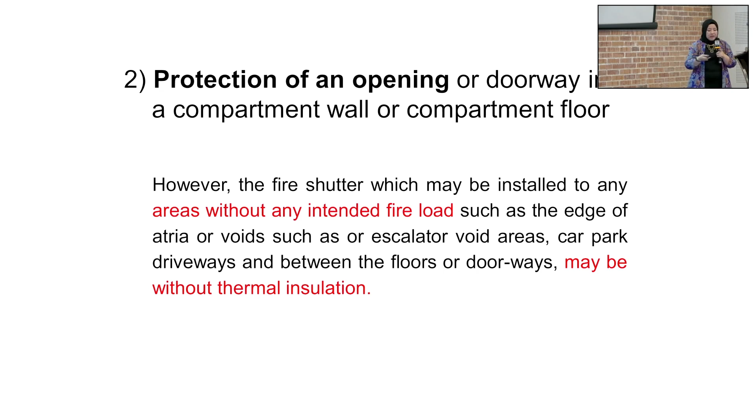Protection of an opening in doorway, compartment wall, or compartment floor. There is some leeway because for compartment walls, we will need insulated fire roll shutters. But if there is no intended fire load, I'll give examples later, we may not need the thermal insulation, so this can be exempted.

So these are the three samples. One, atrium area, so there's no intended fire load there, so we can have this as uninsulated fire roll shutter. This is for escalator voids, can be uninsulated, as well as driveways in basements or multi-story car parks. So these are the three that we can use uninsulated fire roll shutter.

There are certain requirements based on the bylaws in terms of separating walls. For example, diameter of combustible pipes less than 25 mm, diameter of non-combustible pipes less than 150 mm. These are ductile iron and stuff. UPVC is considered as combustible pipes, so it cannot be more than 25 mm diameter. No flue pipes allowed. Doors to have equal or greater FRP as with the element.

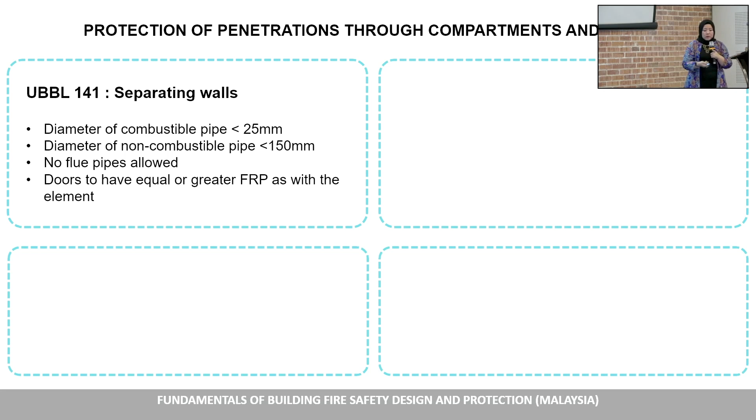So separating walls need to have the same fire rating properties as the compartment wall itself. If you need 2 hours, then 2 hours. Bylaw 148, compartment wall, compartment floor, and walls. So opening for protected shaft, ventilated duct with fire damper - that is the requirement - and also encased ducts to have FRP no less than half of the element. So basically encased ducts will have half of the compartment wall requirement.

Bylaw 150, protected shafts for pipes, ducts, sanitary facilities, staircases, lifts - I'll show that in a diagram later. Bylaw 156, ventilating duct in protected shaft, we need fire dampers at appropriate intervals. I'll show that in a diagram too. This is just a concept for you guys to understand.

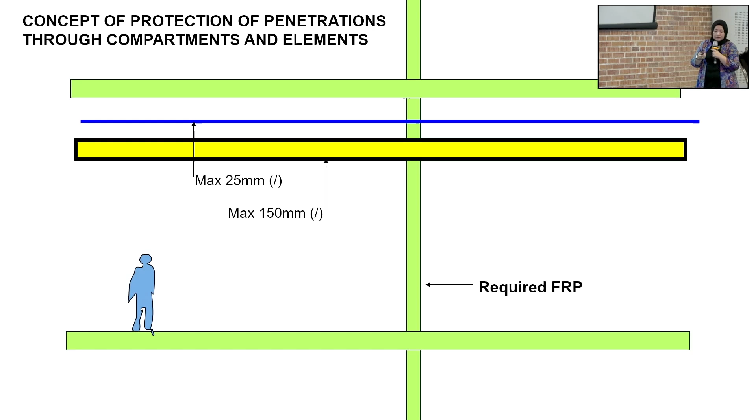So this is a compartment wall, so it requires certain fire rating properties. And then this will be the 25 mm pipes, and this is the max 150 mm ductile iron pipes that can go through. So when these go through the walls, the compartment walls, we need to have fire stop. If this is ACMV ducting, you will need to have a fire stop as well.

Require FRP as per FRP, so if this wall is 2 hours, these elements need to be 2 hours as well. However, if we have ceilings with fire rated board, this can actually be half of the required FRP, and you can omit the one before without the board. We need this as 2 hours, for example. So once we have the ceiling board, it will be half of the required FRP, so we can actually omit the fire stop there.

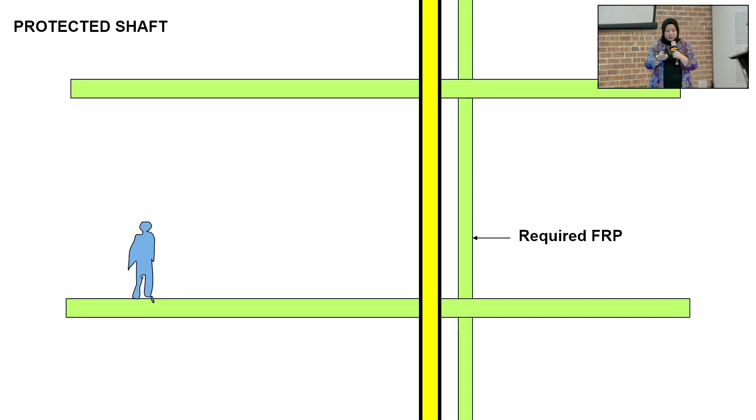Protected shaft - this is slightly easier, I think we've done it a lot. So when we have pipes going through the compartment floors, we do need the fire stop on each floor. And if we make it into a riser, it will be half of the required FRP, so we don't need the fire stop within the riser room itself. I think a lot of people know about this concept, it's just to round out again.

Apart from the pipes, ducts, sanitary facilities, we have to consider others as well. For example, staircases, lifts - these are considered as protected shafts. So protected shaft: staircase PS1, PS2, lifts, and this is your M&E risers.

I think most people know about the protected lobbies and unprotected lobbies and the requirement of the insulated and non-insulated lift door requirements, so just a revision of it.

Scenario 1: passenger lifts open to protected lobby. Basically this will be as per the required compartment requirement, so each one will have the same fire rating properties, and the door itself will be half of the FRP of the protecting structure. So when we have this protected lift lobby, the lift landing door requirement will be half - say we need 2 hours or 4 hours, it will be only half - because we have this protected lift lobby.

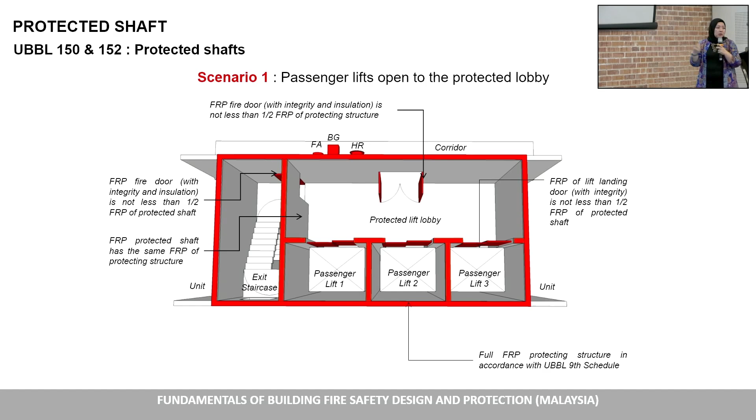Bomba also said that if you have this protected lift lobby, you can actually do away with the insulation - no need for an insulated fire lift door.

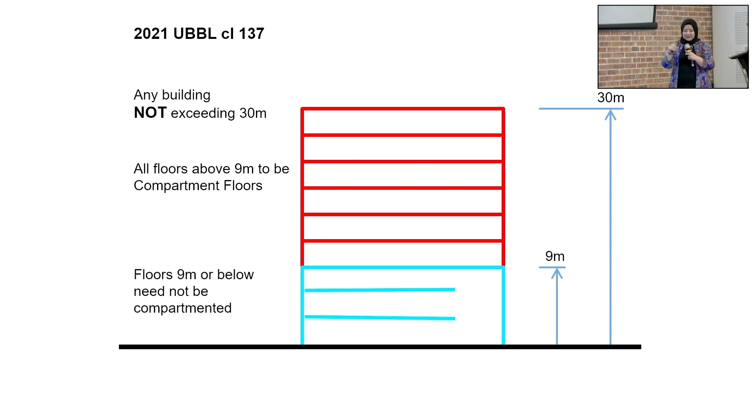Okay, wait, two slides behind.

Otherwise, your drawings will be rejected, and you'll have to come back with a new drawing. So might as well save the hassle, know it now and highlight it in your drawings.

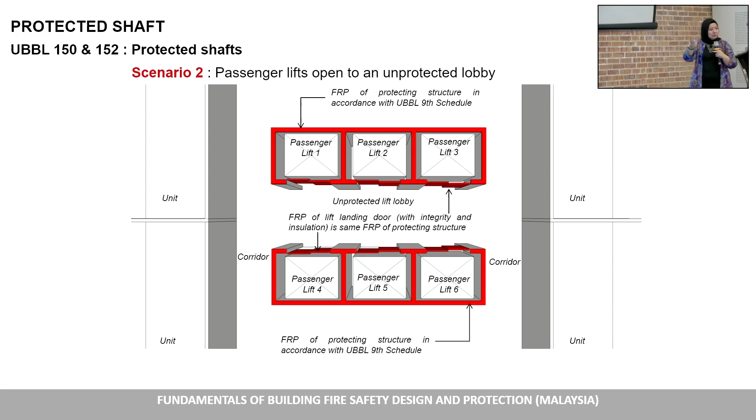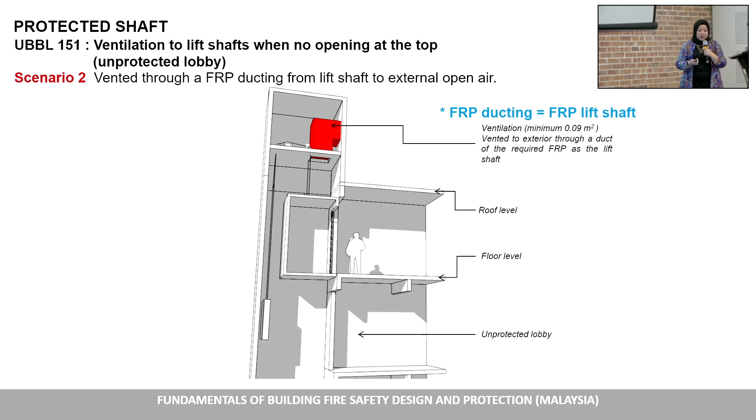Scenario 1, this is ventilation to lift shafts. Either you have 0.09 meter square ventilation on top of your lift shaft, or you can also have vented through with FRP ducting on top of your lift shaft. So these are the two options we have for the ventilation of lift shafts.

Protected shaft, we go back. This is with regards to the mechanical ventilation in our building. These are the ductings that go up, we have this opening to the compartment wall.

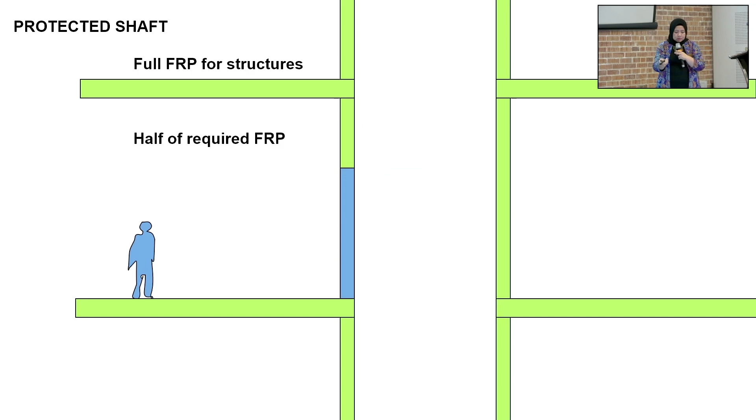The fire stop will require half of the required FRP, for the fire stop or the opening. And also, if you have riser doors, it will also be half of the required FRP.

We have two scenarios in terms of the aircon duct. The aircon duct will require fire dampers, automatic fire dampers. If you see, all the red lines are actually compartment walls and floors, so all the penetrations to the compartment walls and floors will require a fire damper. So here will require a fire damper. When it gets to here, this is a protected shaft, so from floor to floor, we don't need any fire damper.

Scenario 2, the smoke control ducting is made from the same FRP as the compartment wall. Meaning this ducting, as John Cha mentioned earlier, there are also ductings that are fire rated, so the fire rating of this ducting needs to be the same as our compartment wall and floor. If you see here, the ducting stops here, the red ducting stops here, and for the last compartment, you don't need to make it fire rated ducting.

From here, we'll start with the fire damper, and then it goes straight. Once it's in a protected shaft, we don't need a fire damper anymore, so the third compartment here is considered safe, because it's protected by this fire damper, the first one. This is for you guys to understand and perhaps save some money so that we can beautify our buildings a bit more, save from M&E.

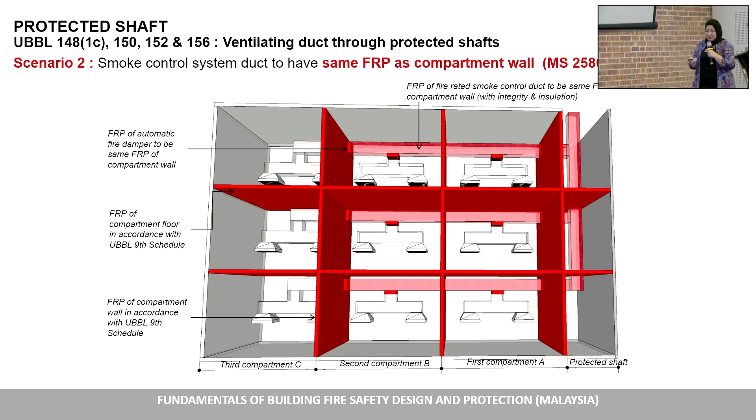So additional barriers - oh, we are at the last slide. Additional barriers between ventilating ducts and protected shaft reduce the risk of fire spread. Because you know, like flues, basically you are just making a chimney for fire to travel from floor to floor. So to reduce that, it's better to have additional barriers between the duct to reduce the fire risk. This is for information.

Then that's about it, thank you so much. Again, I would like to give credit to our team, the fire working group people. I saw architect Chu Heng Hua earlier, so most of the slides were done by him. We do have some members here as well. I did a different topic, but fortunately today I learned from them on the other topics as well.

So hopefully you guys haven't fainted. Everybody is still awake, right? Okay, so thank you so much. Today has been an incredible turnout, we are surprised, 250 pax plus walk-ins today. Hopefully everyone learned something, and hopefully I can learn something from your questions later as well. Thank you so much.